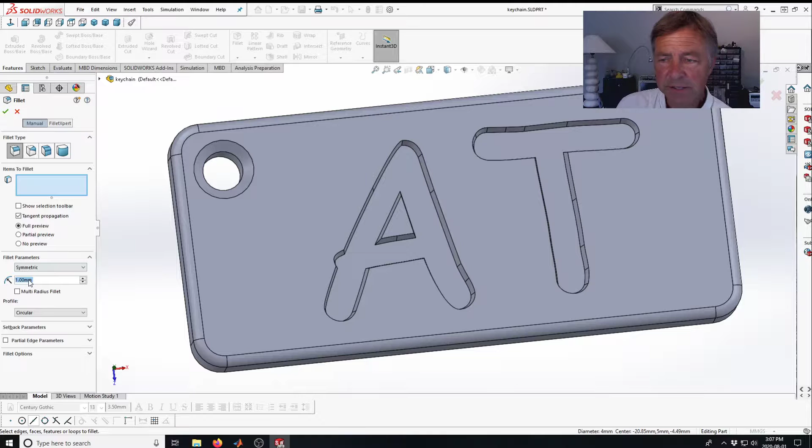Fillets are pretty handy. I could go into the fillet tool, and it's set for 1 millimeter. That might be too big, we'll try it. If I select the whole face instead of that edge, it's going to see if it can fillet the whole face. Let's see what it does. Oh, gives me an error. I hate this. Drives me crazy.

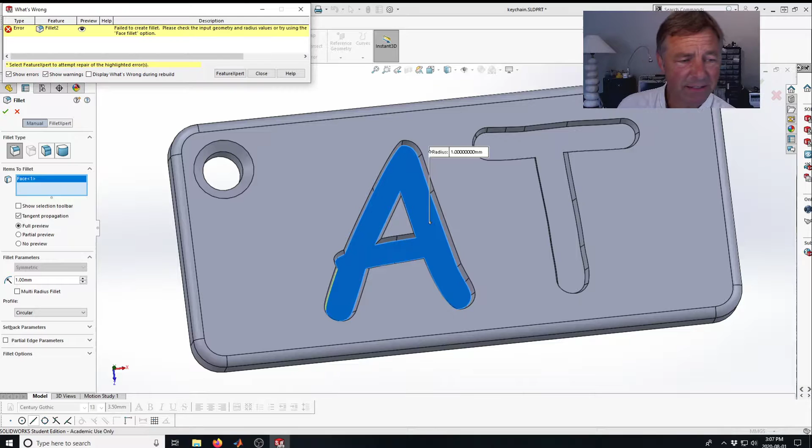So what error did it say? Failed to create fillet. Please check the input geometry and radius values, or try using the face fillet option.

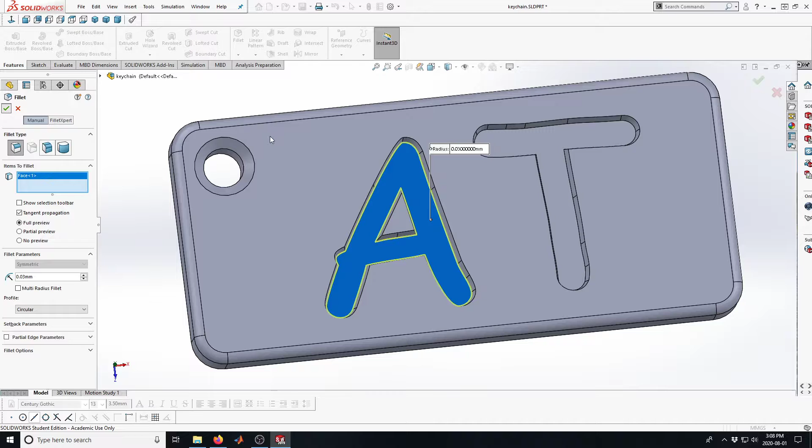Okay, well, 1 millimeter was pretty big. What if I make that 0.3 millimeters? See if it does it then. No, still doesn't like that. I could keep making smaller diameters, see if it works at 0.03. It did it, but you can see here the fillet is so tiny that it really isn't going to help very much. 30 microns, yeah, that's not that nice.

I'd rather go back up to 1 millimeter, and then it's not going to like that. But there are these other options that I can change and play around with, and they'll drive you totally nuts.

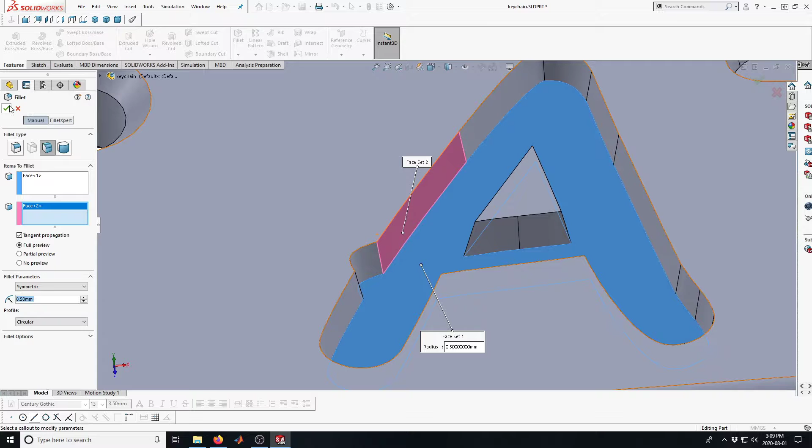So I'm just going to delete that fillet and try it again. I'm going to go to fillet, and the first time I do it, it offers me the edge fillet I was using, or face fillet. With the face fillet, I'm going to select the diameter, which would be, I'll make it 0.5, a compromise. Items to fillet would be that, and the thing to fillet it around would be that. Let's see what it does here. Oh, it doesn't like the size of that either.

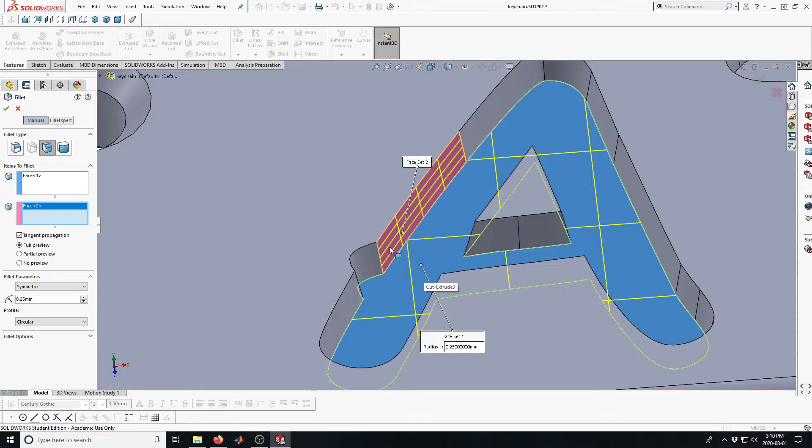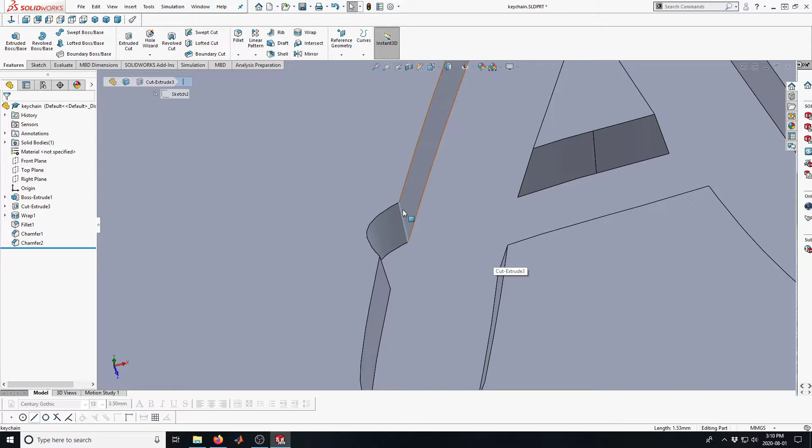So what's it doing? Why is it giving me all these errors? This will drive you absolutely batty with Solidworks. You're trying to use a tool and it's giving you errors and you don't know why. In some cases, it's actually telling you the truth, which is it can't do this. What I'm asking of it, to fillet this face, is asking it some impossible things. So I'm going to just get rid of that. It didn't create the fillet. The problem was that this thing I want to fillet has all these sharp edges, and it's simply geometry, it can't actually carve this edge and round it like I showed you with the 0.03 for anything very big, because it's going to really conflict with some of these sharp corners.

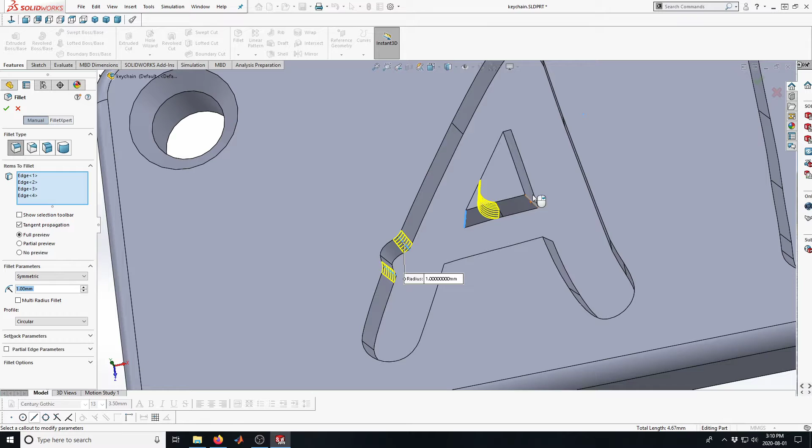So what I might rather do is like this. I could start to round some of these things. I could even make a 1 millimeter one. And then I can go around, and any of these places that are kind of wonky, I can get rid of them, or I can round them off like so. And I can pick an awful lot of those first, like that.

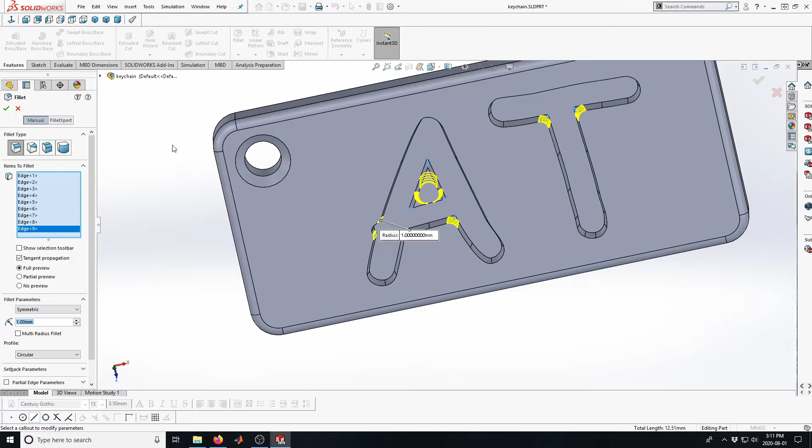So now I've smoothed out some of this feature. Well, now if I go and pick that and try to do a face fillet.

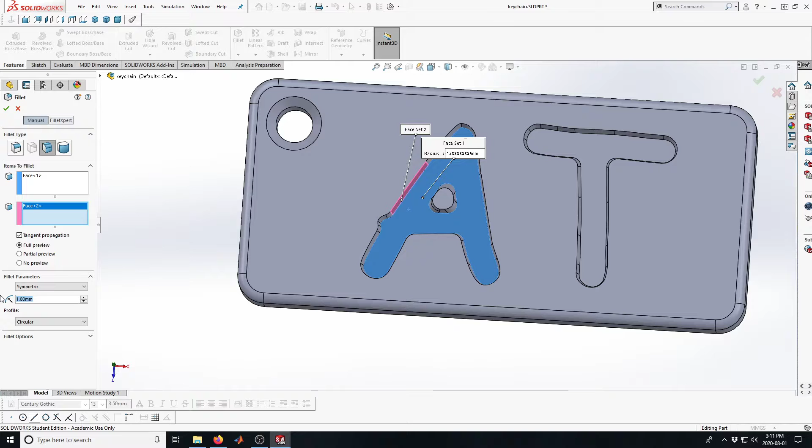I tell it a face fillet and I want to fillet this. Let's see if that's going to work. Oh, it didn't like the size of that again. So it's still telling me that there's a problem with it.

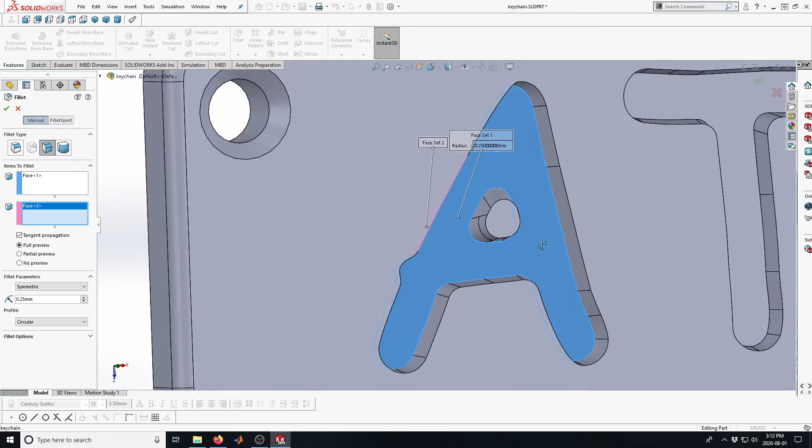Now I can look here and see what it is that it doesn't like. It should show me some indication, not always, of where the problem lies. I'm guessing it's actually up in one of these corners where there's a sharp turn.

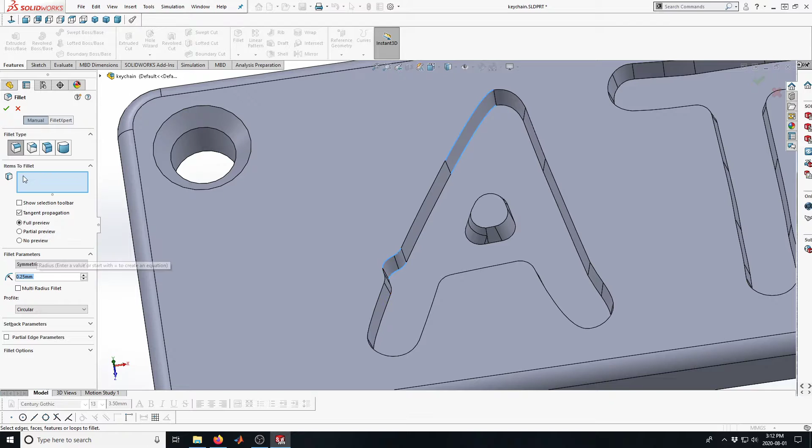So I'm going to delete that. I'll go back to the simpler fillet, which is the edge fillet. See, it was doing that. And if I pick this edge, it's telling me that there's the problem. It's hard to see, but you see this sharp edge here? That's the problem.

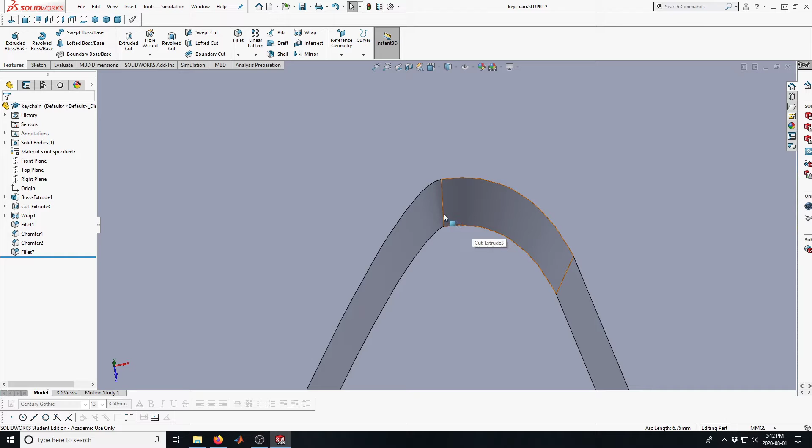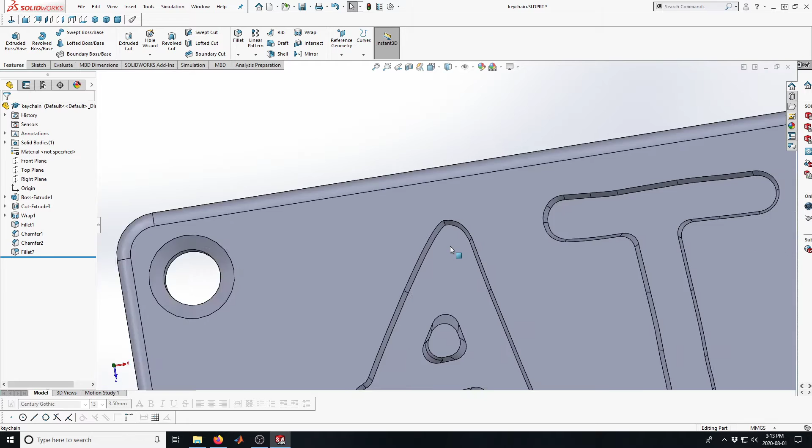So when I go and try to fillet anything, it's telling me that there's something way too sharp in here. You will encounter problems like this in SolidWorks all the time—crazy stuff you hadn't really thought was an issue, because you can't actually see it. This was a font that wasn't intended to be smooth, and it causes a problem.

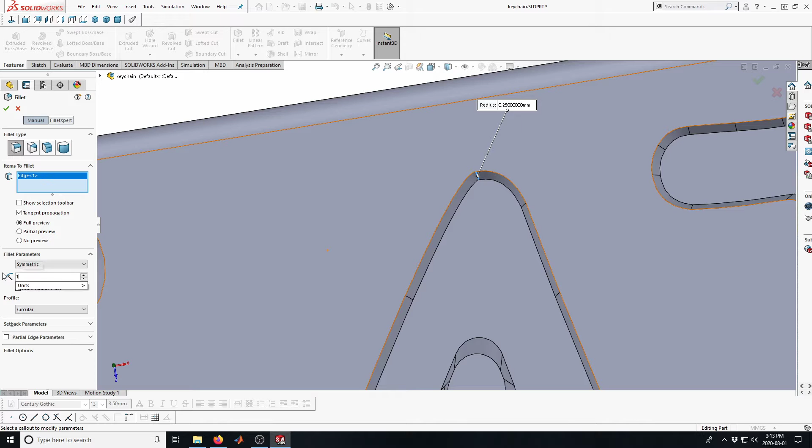Now if I pick this, I want to go back here to this edge. If I pick this, it may or may not be able to fillet that. Yeah, it was able to smooth that out. Who knows, that may be the thing that fixes it and makes the whole thing work.

But really weird problems like that crop up all the time. Beware—that's one of the advanced things I wanted to show you. Don't get frustrated. Well, okay, get frustrated—you will get frustrated, there's no way around that. But when you get frustrated, start to think: it's not just that it hates me, it's more that I'm asking the thing to do something that's geometrically impossible. Where's the flaw in the geometry? In this case, I was asking it to do something that was basically impossible because the geometry wouldn't allow it.

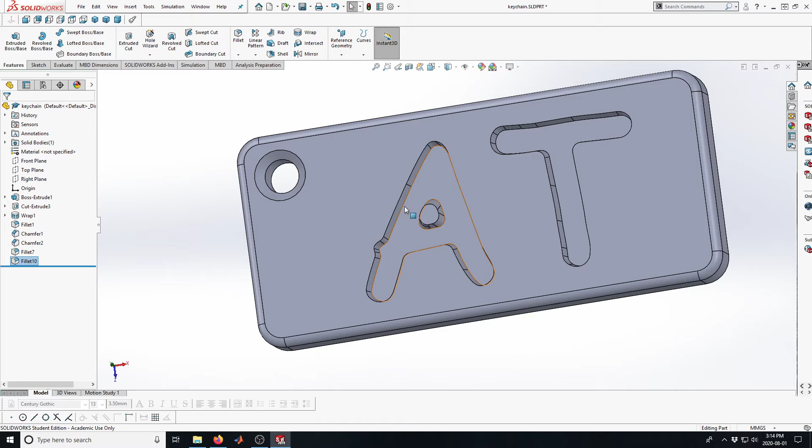I'm just going to try one more time to see if I can fillet. Oops—fillet now that I changed that one little corner. Pick that. Ooh, look at that, something different happened. I'm going to reduce that down to 0.35.

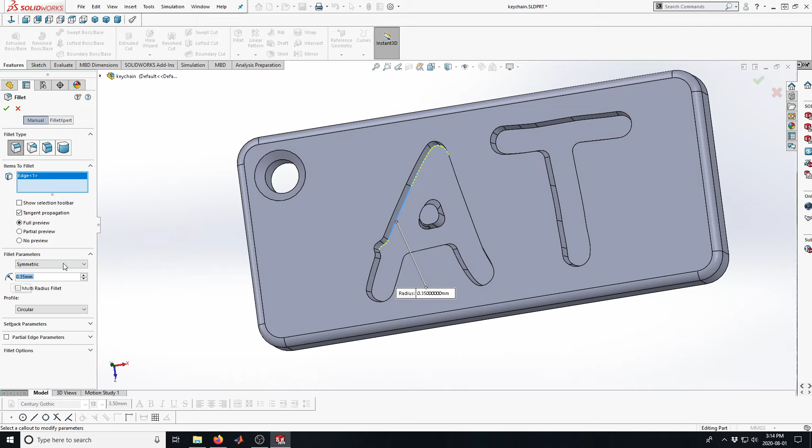And in fact, I'm going to pick that, and so now it should pick a whole bunch of these edges for me. If I pick them all, eventually I'll get the fillet all the way around that I want.

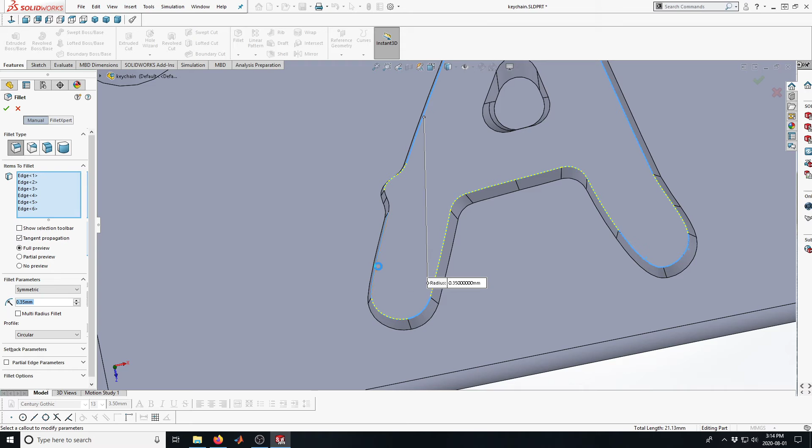Let's see if that works. Nope, still didn't work. But it was better—at least it gave me something that was looking like it was going to work, sort of. I'll just pick that and see what it does. No, didn't like that. But you can keep working away at this sort of thing, and it'll drive you crazy.

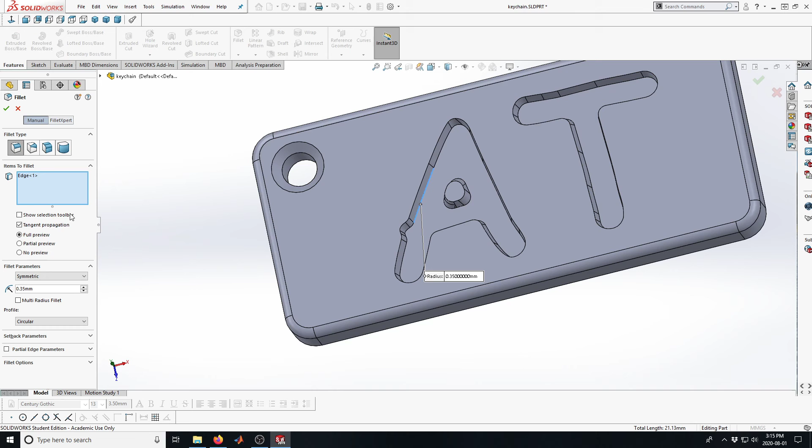So that's one of my bits of advice: try some of the different tools. Recognize when you use them that you need to satisfy geometry, as well as understand what the tool is being asked to do. Fillets are really frustrating and annoying.

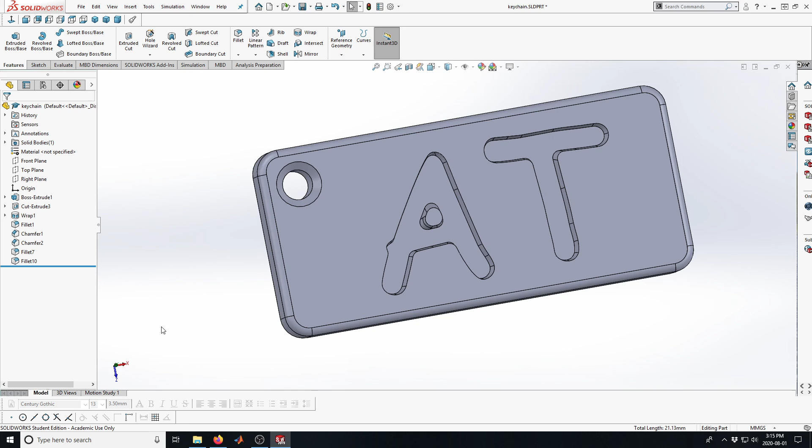So I'll show you another video next that is not a fillet, but will do something else interesting to this. Talk to you soon.